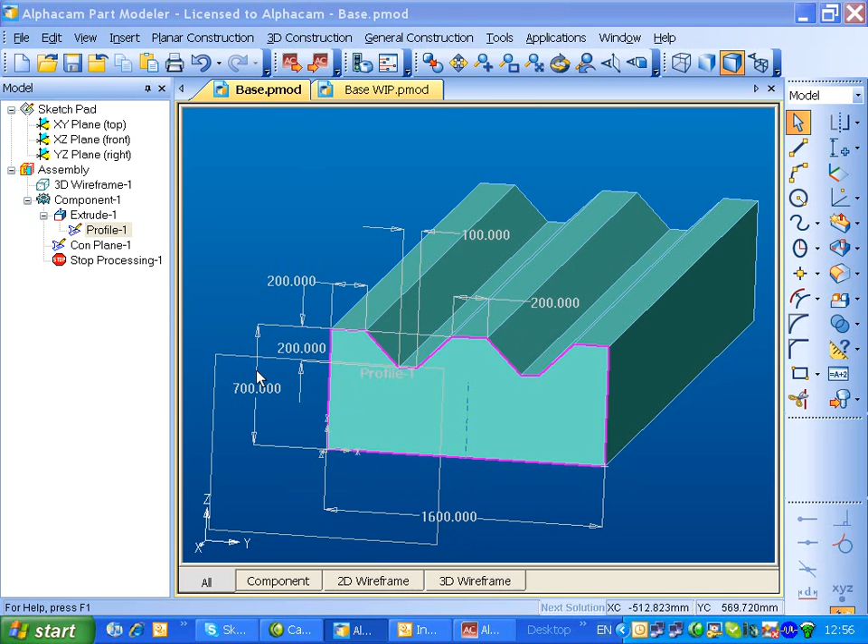We'll start creating this base, driven off this profile, working from a 1600 by 700 rectangle. Then we'll do some offset lines and some trimming. Before we start, I want to make sure I'm in the correct plane, so I want to be looking to the right of here. Start with our rectangle then, 1600 by 700.

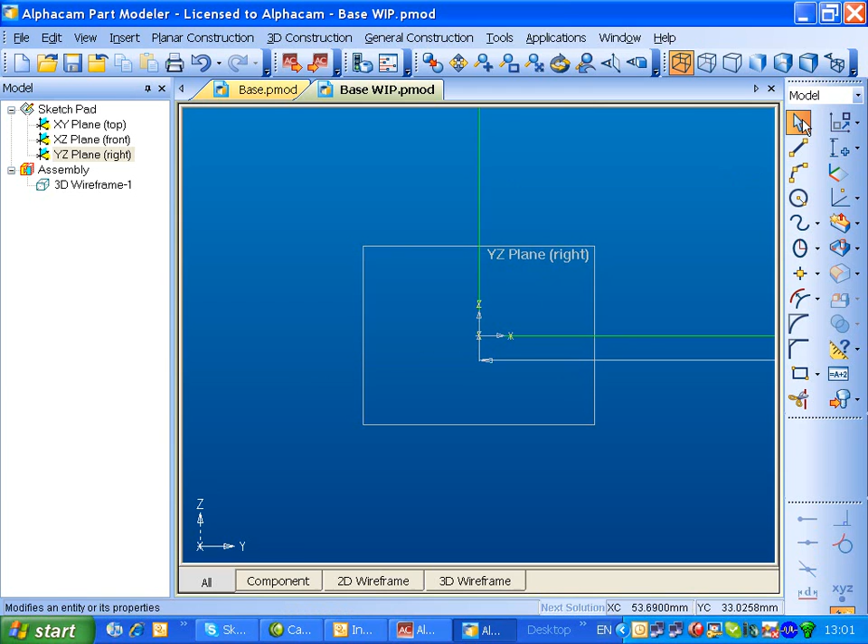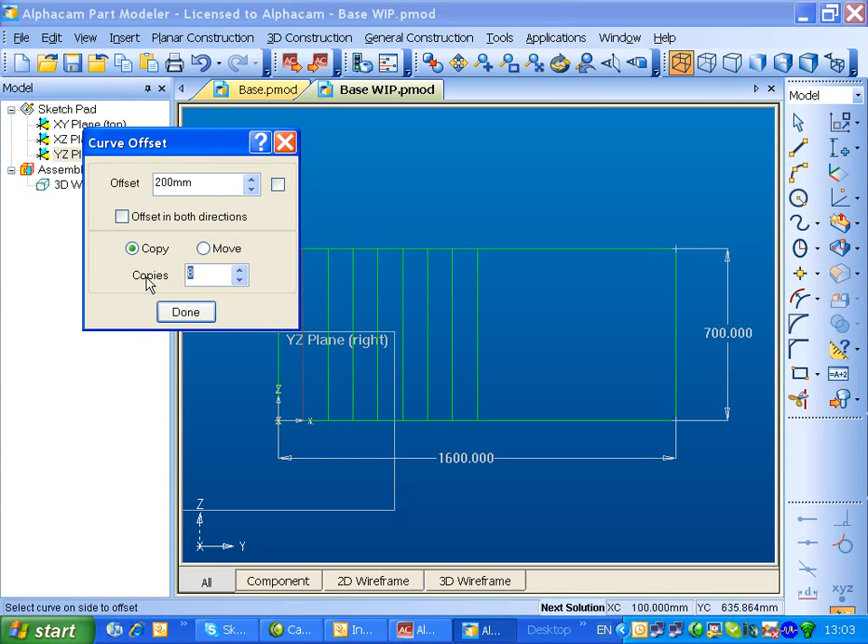There are many ways we can do the next bit. I'm going to use just an offset, single offset, offset by 100 millimeters. I want to maybe do 8 of them, and then I want a 200 one, and I only want a single. Come down from here, done.

And now I'm going to create some lines. A line from here to here, and then from here to here.

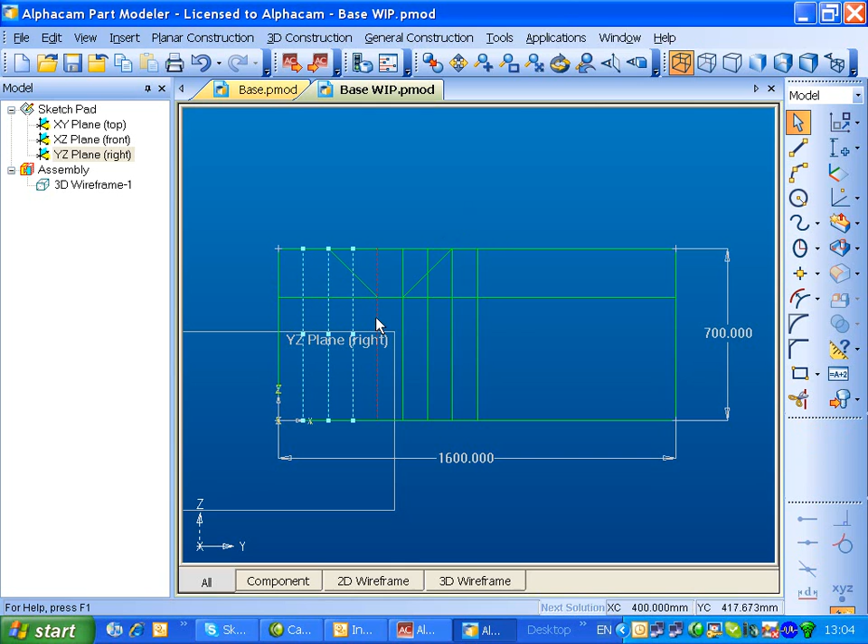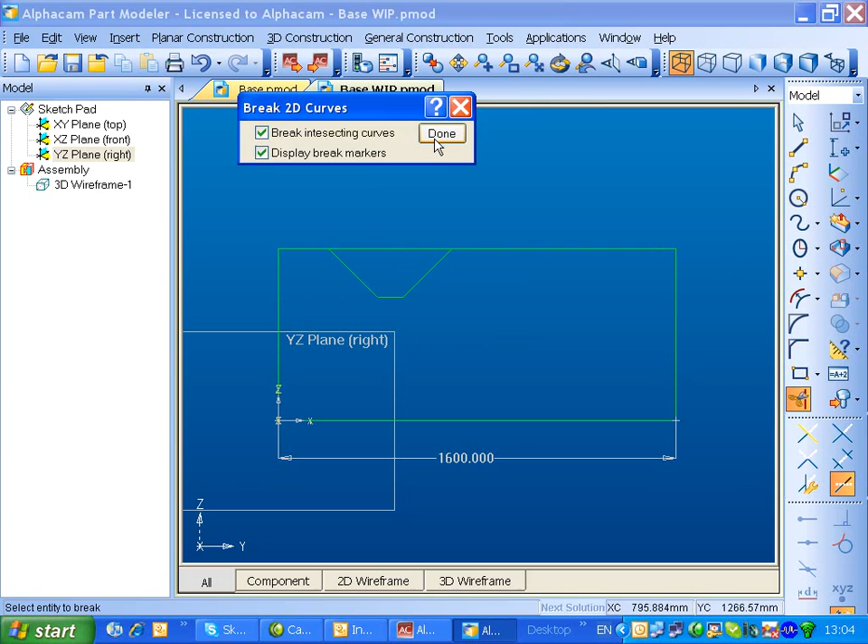So then we'll do some deleting of things we don't want, holding the control key down. Don't need any of these. Now, delete. Do some trimming. Click the bit we want to keep. And then we'll trim using break, which is this. Okay, done. And we'll delete that.

Talk about doing some mirroring. We're going to mirror these entities. Got the midpoint of there. Okay, and then we'll do some trimming again. So trim. Okay, done. And we'll delete that.

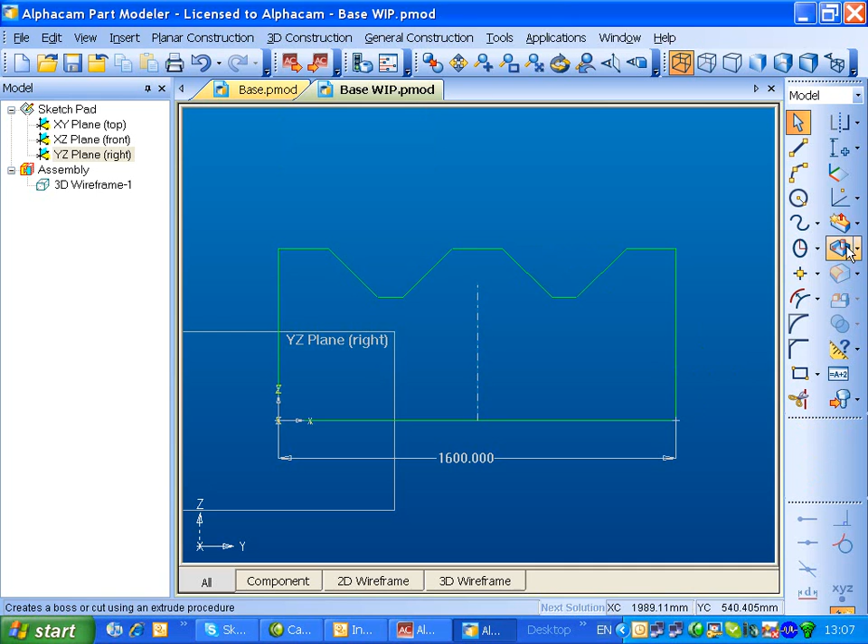We should then be able to extrude that. And I want to go down, I think it's 5100. So we have the start of our machine base.

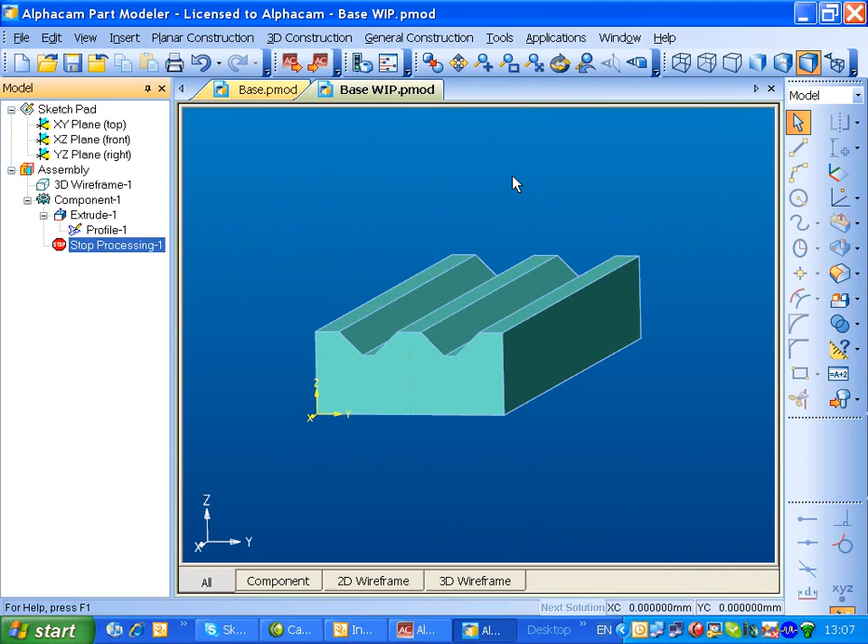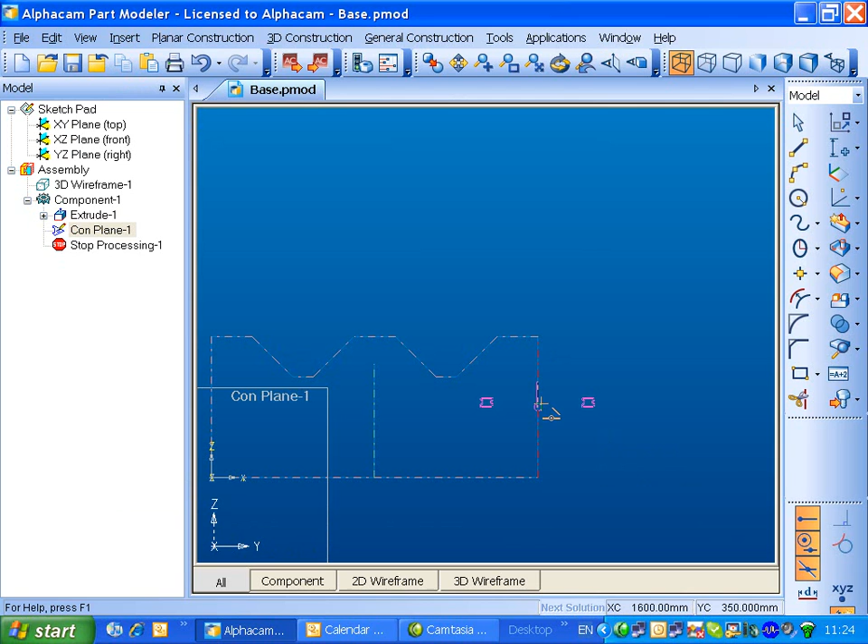Let's just edit the origin. We'll drag that from there to there, and we'll see that we need to rotate these.

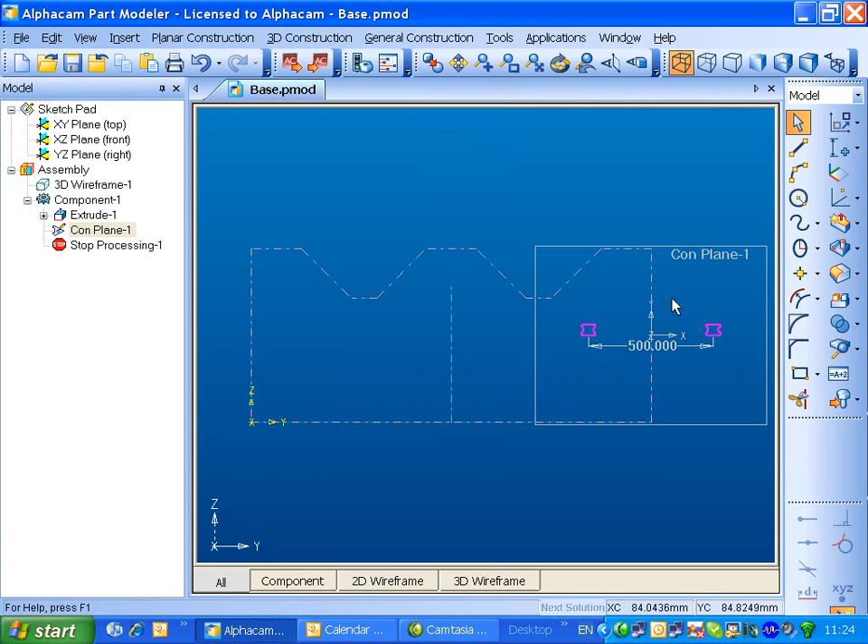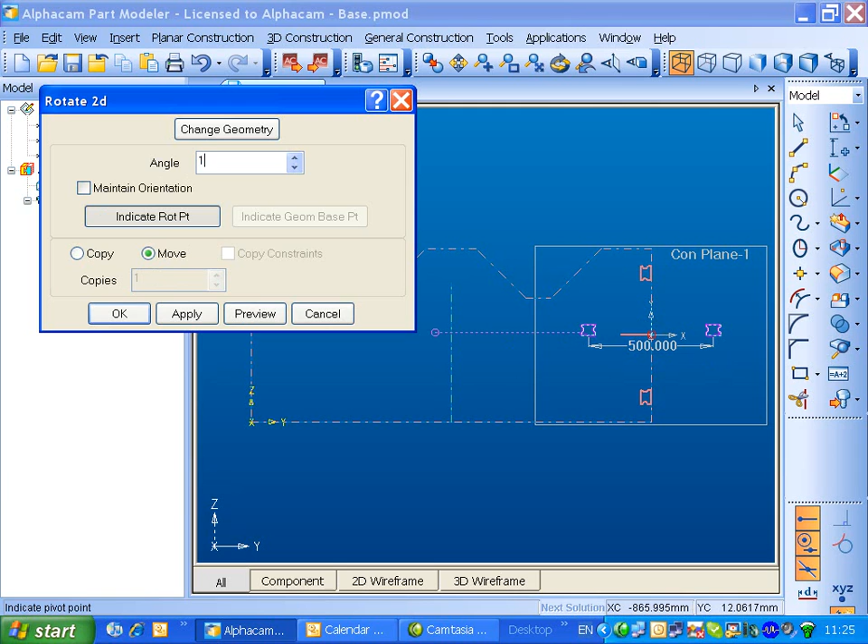2D rotate these elements. About this point I want to move them, and I think, let's try 90 degrees, preview. No, let's try 180. Let's try 270. That's better. Apply. Just agree with that.

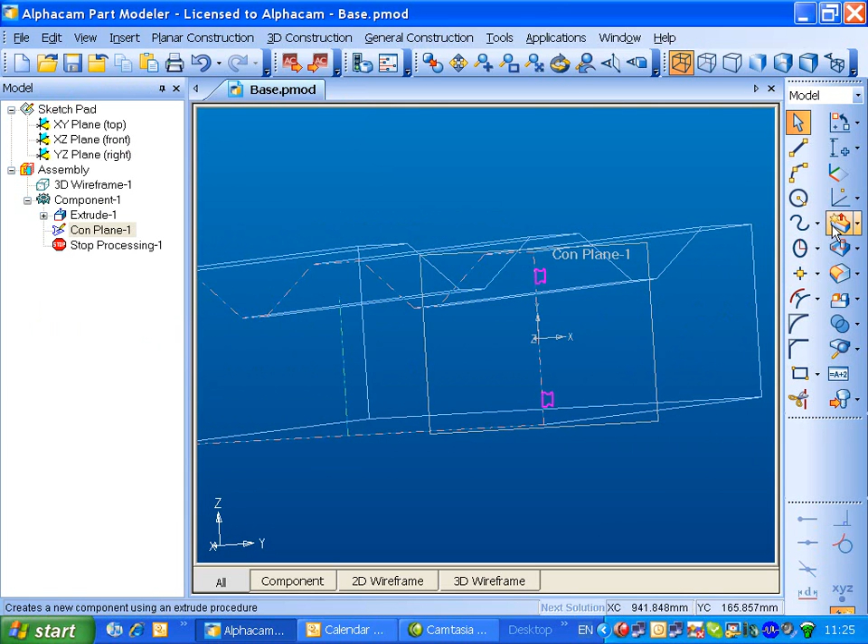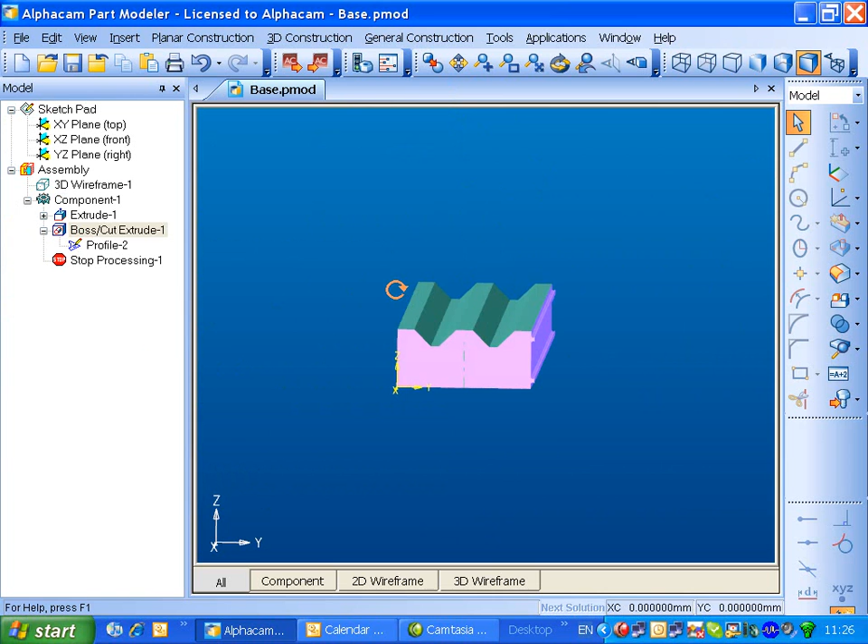So now we can extrude those. And I want to extrude those, and extrude them to the plane. Choose the face, come around here. This is the face. Let's preview that. Okay, let's have a look at that. Good. I think that's the base complete.

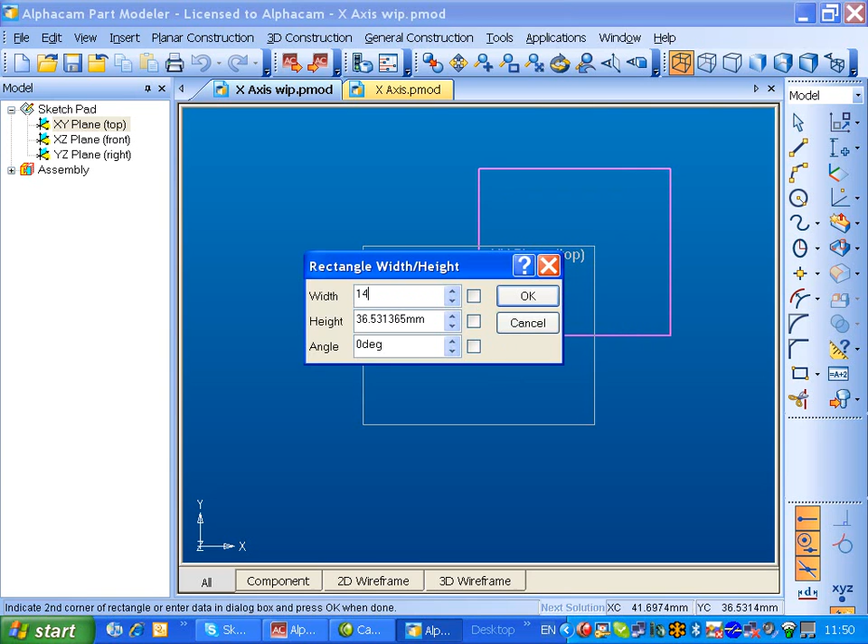To create our x-axis, we're going to start by creating this profile, starting with a rectangle 1400 by 1800, put a chamfer and some fillet rads. So let's start with a rectangle 1400 by 1800.

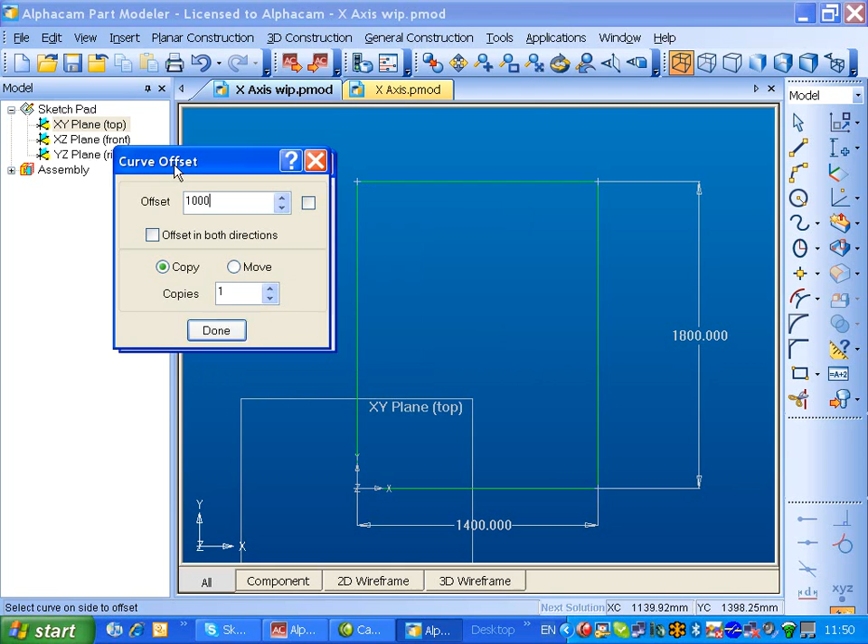Drag these out of the way. Okay, I'm going to do an offset of maybe 1000 from here, and 700 from here. And then we do some trimming.

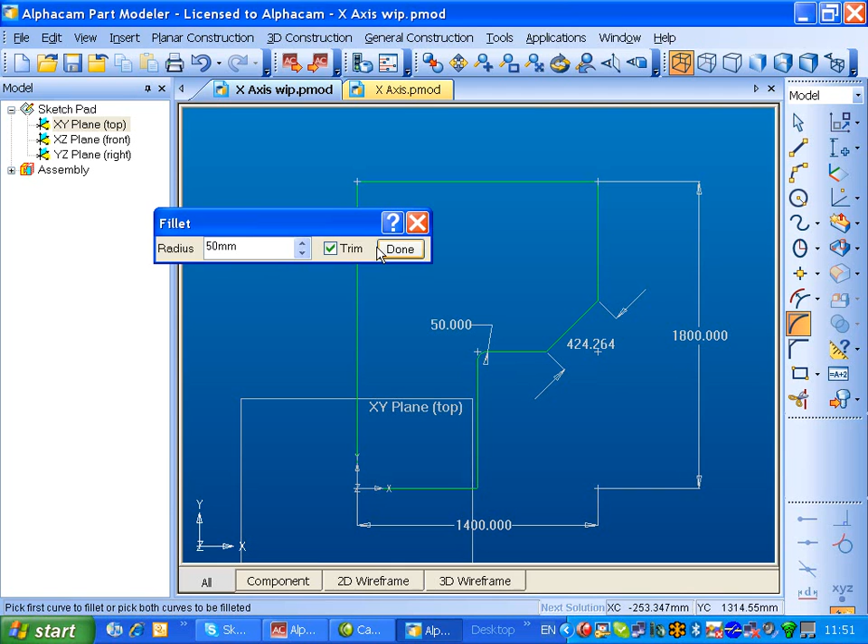Click onto the bit you want to keep. I'm looking at doing a chamfer, and maybe a distance of, let's say, 300 by 300. We'll come back and edit this in a moment. Done. And a fillet rad. Let's do a fillet radius of maybe 50, this little corner here. Done. Come back and edit this, and I want that to be 500.

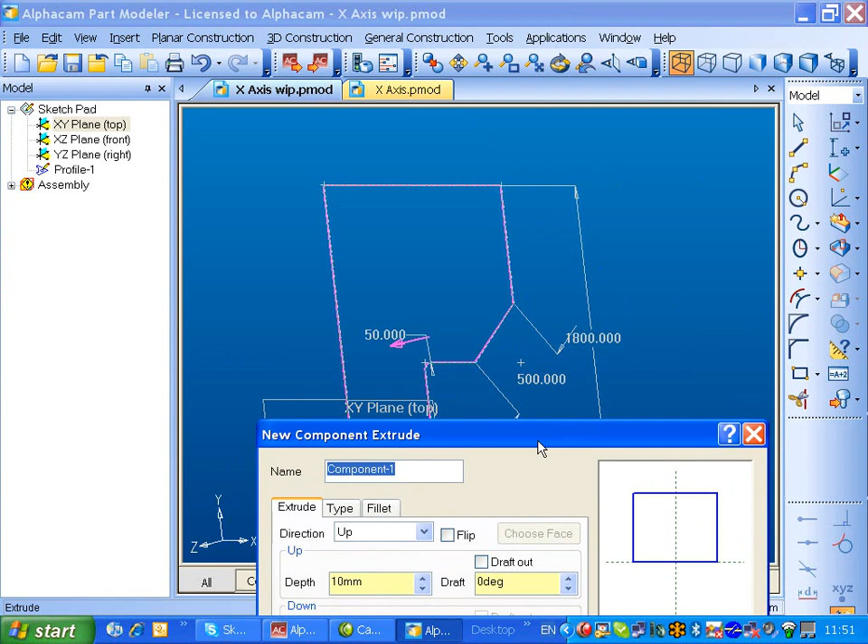Okay, we're now ready to extrude that. So into new component, extrude. I want to extrude that down, I think. Yep, so let's go down, and that's by a distance of 700.

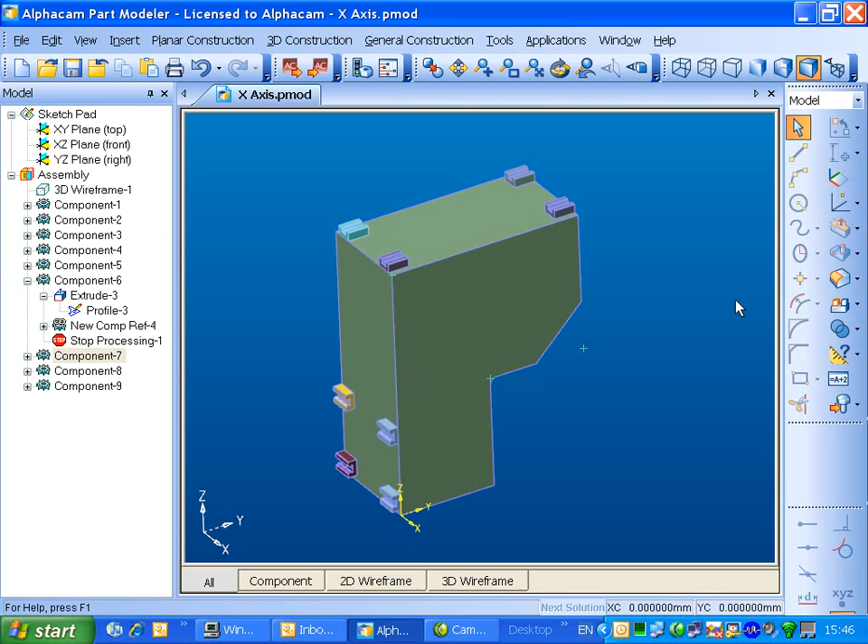So we're now going to use the insert profile command to create these bearing blocks on this vertical and horizontal face. We'll select our construction plane as being on here. I want the origin of that to be up by 350 millimeters in the Y. Let's have a look on the end, and on there then we'll insert our profile, which is going to be the bearings.

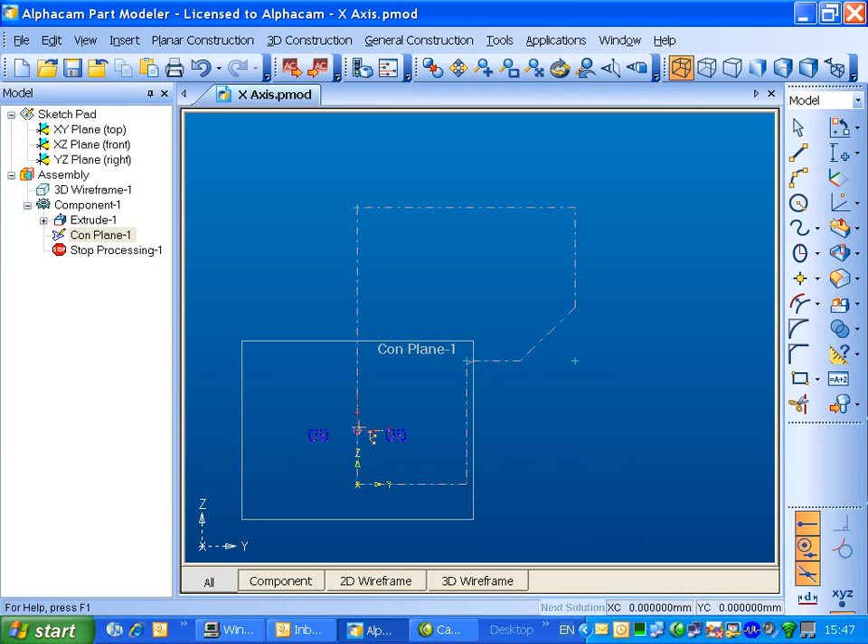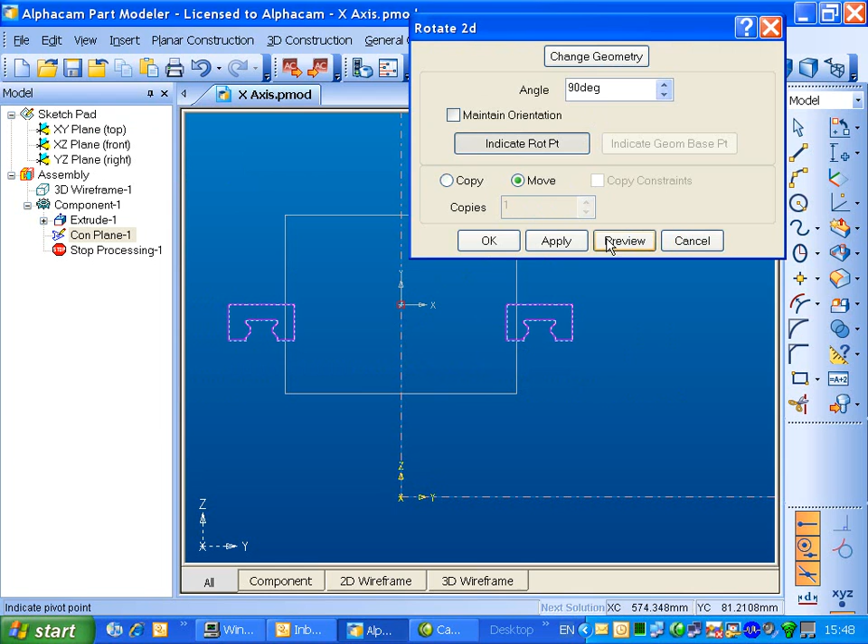About the origin, we're going to have to rotate those. 2D rotate. Okay, I want to move them probably 90 degrees. Got this origin, let's preview. Let's try 270, it's better. Okay.

So while we're there, we'll create some new components. We'll extrude those down by 150.

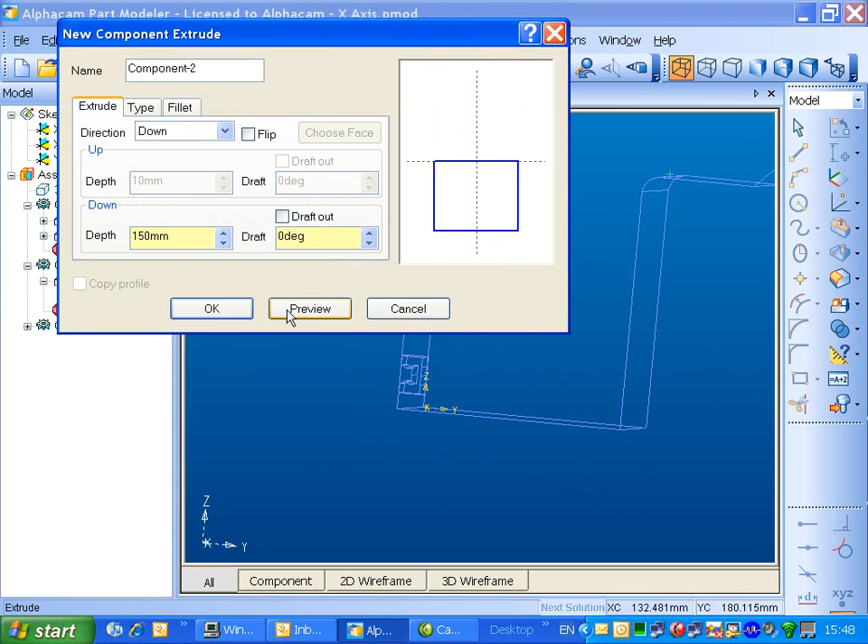Okay, and then we'll do a copy of those. We'll do our 3D translate. Pick up this, hold the control key down and that. I want to move them in X, and it's minus 700 plus 150. 0 on that, 0 on that, and preview that. That's looking good. Okay.

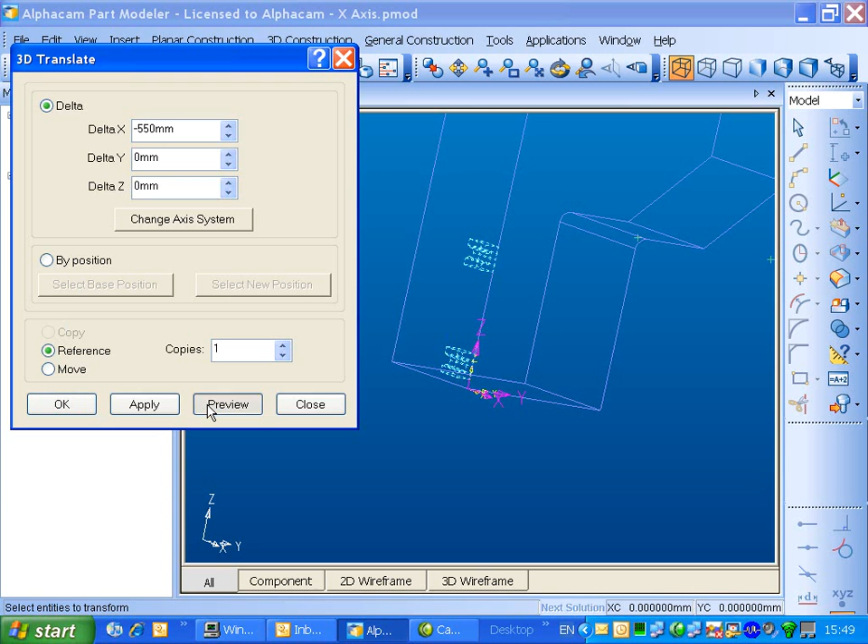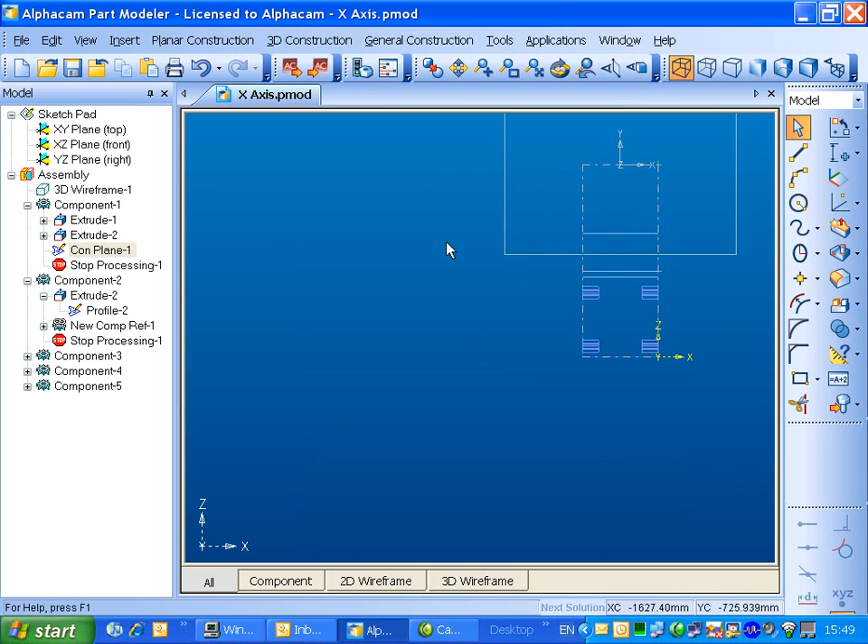Let's pick the next construction plane. We'll transform the reference point on that by 350 again. Insert our profile.

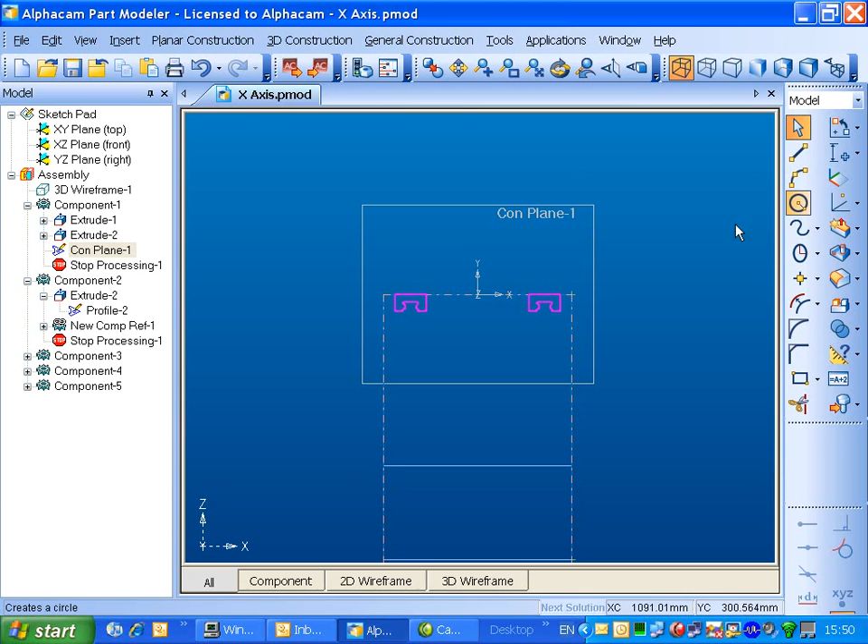We want the bearings on there. I think we do. Yeah. They need to be the other way up though. So let's do a rotate again. Okay, do that by 180 degrees. At this point, we'll move, preview.

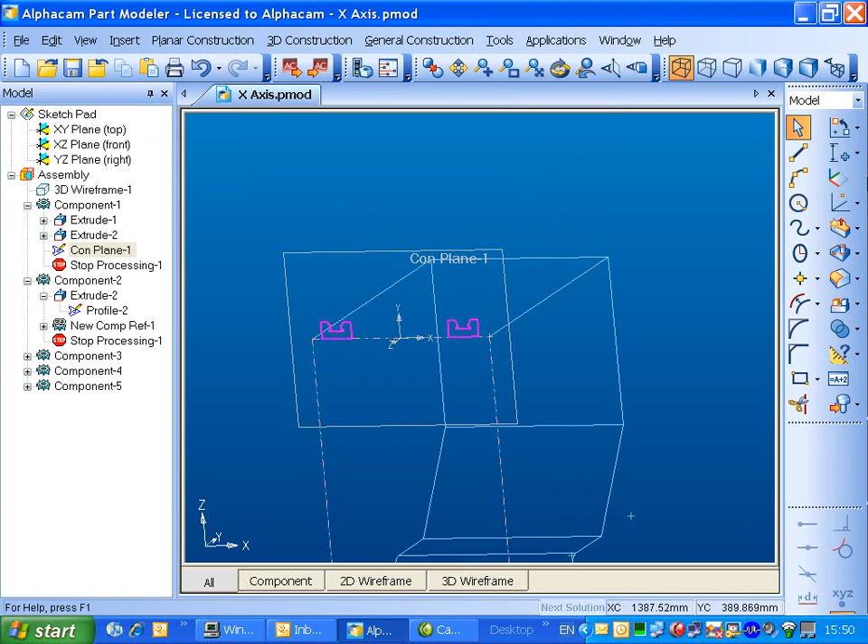Okay, extrude these down by 150. Preview that. Okay, now we're going to copy those.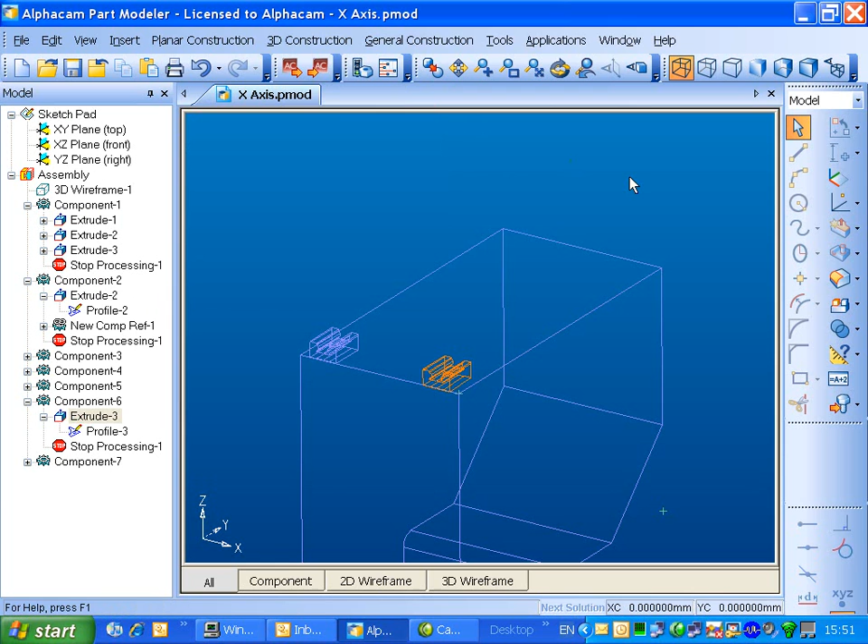I can't remember what the length of that was, so we'll just use this little tool here. So from here to here is 1400. 1400 less 150 is 1250. So we'll do our 3D translate.

We're looking at this and this, and we're moving it down the y-axis, 1250, 0 in the X, 0 in the Z. Previewed that. Oh, it's in the Y-axis, I went and put it in the X-axis. Preview that, that's better. Okay.

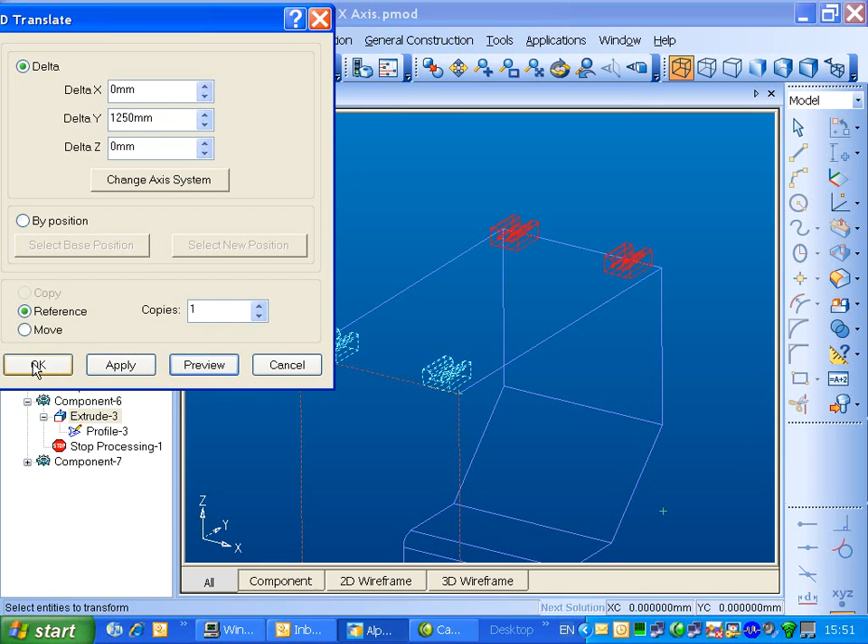So now we've completed our X-axis with bearing blocks.